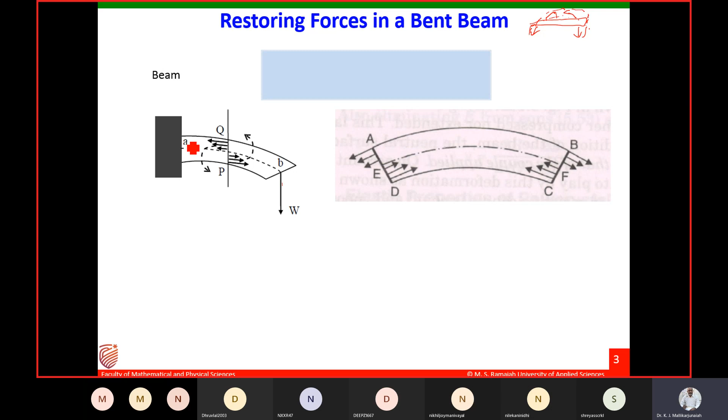That is the general meaning of restoring forces. Let us take this beam and pull it at one end, assuming the other end is fixed to a solid support. Whenever it bends, what happens realistically is that the outer layer we are considering, from that point onwards, some portions start elongating and some portions of the beam start contracting. That elongation and contraction are bound to happen whenever the given body is under stress.

Whatever extra force I am applying to make this beam bend, that will be counterbalanced by the corresponding bending couple. Whatever I am applying here should be balanced by another equal and opposite couple getting generated. The moment of this elastic couple, we call it the internal bending moment. This is whatever is getting tracked, the force or moment of this elastic couple, what we call the internal bending moment.

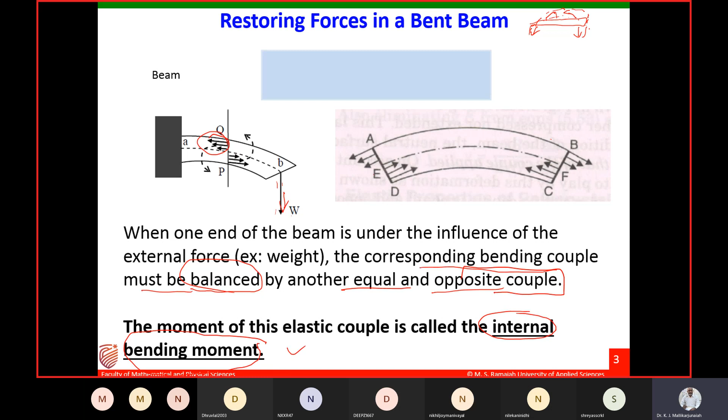This is the property of the given body which makes it remain intact under the influence of external forces. Let us consider this in a little more detail. Let us consider the beam. Assume that whenever we bend a pen or anything, there is a central layer which is not at all getting affected by the extra force we are applying on either side.

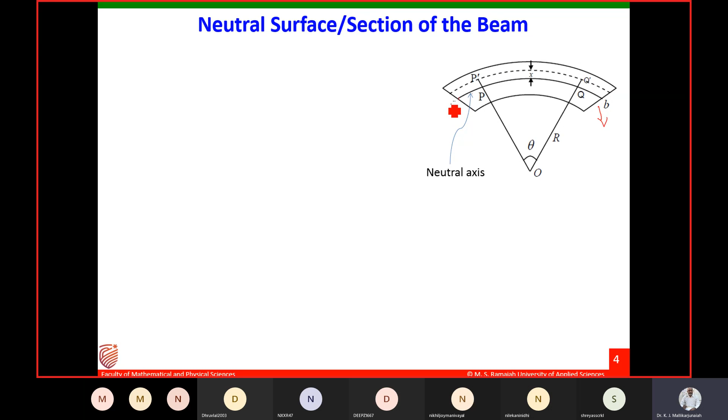Let us consider a filament P dash Q dash. From the neutral axis, let us consider another filament which is above that. I think we already discussed this in the last class, I'm just reiterating, that's why I'm going a little fast here.

I'm considering a new element P dash Q dash at a distance x, and the length of the filament in the unstrained condition is the same as PQ. That means P dash Q dash is equivalent to PQ whenever there is no extra force. But because of the extra force, P dash Q dash got elongated or strained. Now let us see how much length, how much it got elongated, due to the external force.

Okay, the original length PQ is equal to r theta. We already know arc length is given by radius of that arc, and what angle is subtended with respect to another reference point. Therefore PQ is given by r theta, and in similar fashion P dash Q dash is given by r plus extra x, R plus x into theta. Now the increase or change in length because of the extra force is given by x into theta.

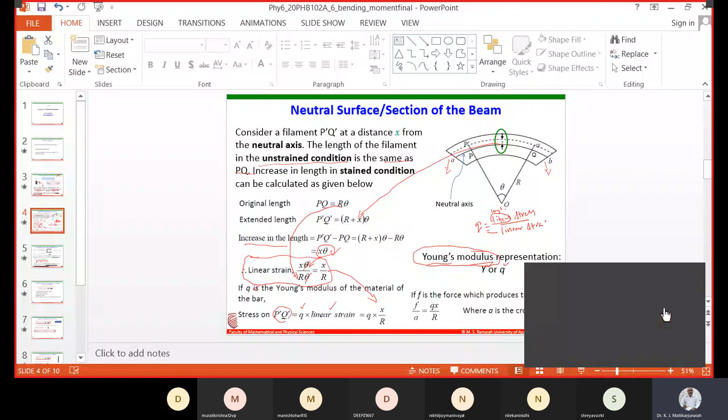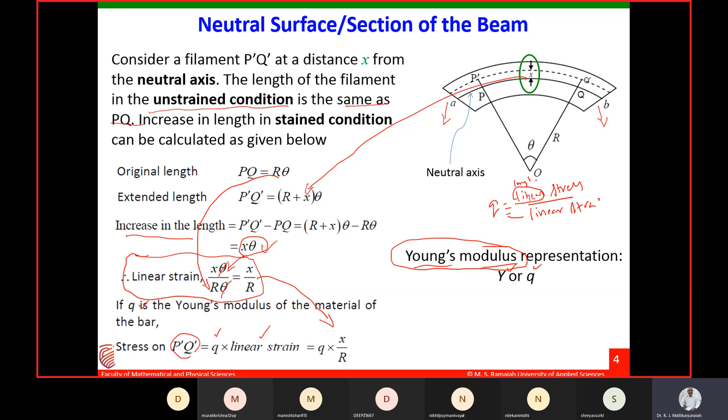Okay, now basically we got up to this point. Then here, once we got the expression for stress, how do we define stress?

Stress is defined as force per unit area. This linear stress is given by force per unit area of cross section. Let us assume there is a notation for cross sectional area as A, this is area of cross section. As I mentioned in the last class, please don't get confused with this A and the neutral axis representation AB. This is the neutral axis representation, where whatever we are writing A is the area, area of cross section. Therefore, stress is given by force per unit area.

Therefore, LHS I am substituting as F by A, and RHS we have QX by R. Now let us consider the same point. If F is the force which produces the stress, then that stress is given by force per unit area, and right hand side we just got the relation where A is the cross section.

Please remember this, whatever A I am considering right now, it is the cross section of the beam. Cross section of the beam.

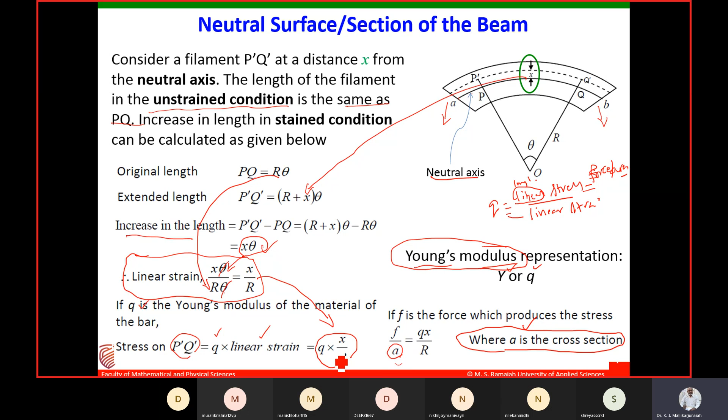Therefore the force which produces the stress is given by, just simplification of this relation, F is equal to Q into AX by R. I hope all of you are able to write it down, because this has already been discussed in the last class.

Now we got the expression for force. Now I want to measure what is the moment of this force. Now we got the elongation on a filament, what we have considered as P' Q'.

Now we got what is the force acting on this particular filament. I want to find out what is the moment of this force along the neutral axis. Force is acting on this layer, what we had considered for the time being. Now I want to understand what is the moment of this force along the neutral axis.

Therefore, moment of the force is given by force into perpendicular distance from the reference point to the given point. The distance is x from the neutral axis, and F is the force acting on the filament P' and Q'. Hope all of you are able to follow this step.

This is a very important step, that's why I am reiterating. Now that is given by the same expression, F multiplied with x, therefore x becomes x square, and all other parameters remain as it is.

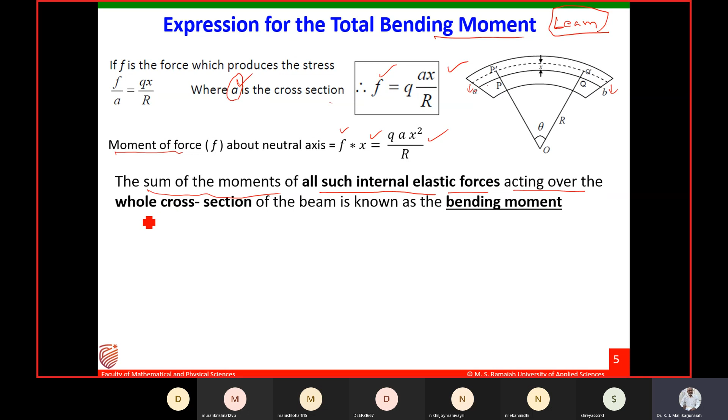Therefore, the net moment of the force, the sum of the moments of all such internal elastic forces acting over the whole cross section of the beam, we call it bending moment. The effective bending moment of the beam is the sum of such moments of all such internal elastic forces acting over the entire cross section of a given beam, that we call bending moment.

And hence the bending moment can be written as the summation of all these terms. We know that Q is the Young's modulus of the given material of the beam, therefore that is constant, and R is the radius of curvature it could have formed due to the application of the forces. Therefore that is also constant. This R remains constant, so that R we can take out.

Now I am left with summation of A into x square. A is the cross section and x is the representative filament's position with respect to the neutral axis. Therefore, the bending moment is the sum of all such moments of those forces. That's why we have written this formula.

Guys, are you able to follow up to this point? Hello? Yes sir. Okay, therefore I am replacing this summation of A into x square with another parameter I.

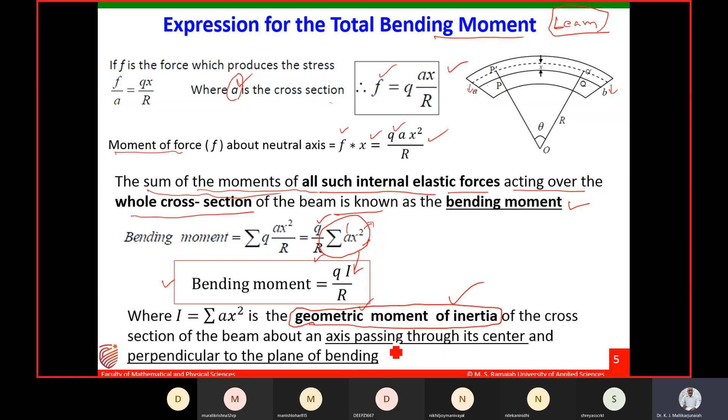Now we got the expression for I, geometric moment of inertia also. Now let us try to get a mathematical expression for the total moment of these forces. Just now we got the expression, bending moment is given by Q into I by R.

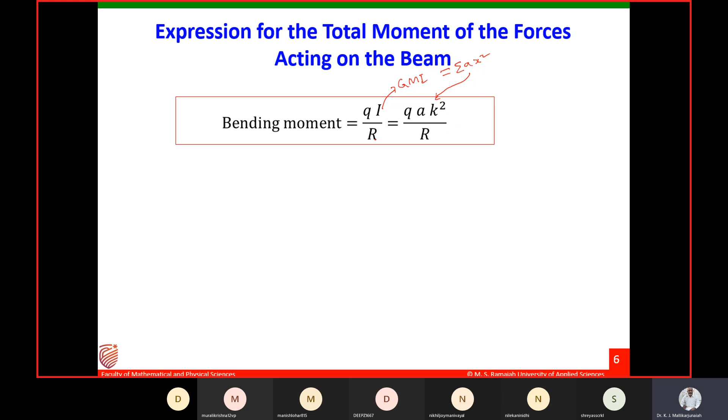I is the geometric moment of inertia, given by summation of a into x square, which we just defined. That can be written as a into k square, where I represents geometric moment of inertia, k is called the radius of gyration, a corresponds to the area of cross section, and q represents Young's modulus.

The denominator term r represents the radius of curvature of the neutral axis, which we already defined. If you make a circle out of that neutral axis, the radius it can subtend corresponds to r, and k is the radius of gyration. This is a new term we are going to discuss in detail.

Now the bending moment we got in terms of radius of gyration. Let us try to have this radius of gyration and area, and rewrite this entire geometric moment of inertia once again. Basically now we are restricting this general formula to different shapes of the beam.

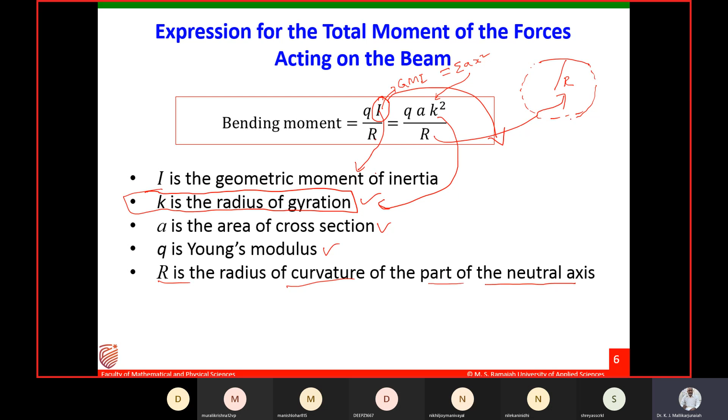Now let us consider a rectangular cross section beam. For that, the bending moment is given by q into I by r, and I is equal to a k square. This is the standard definition we are having. Now for rectangular cross section, what is the area of cross section? Breadth into thickness, depending on what is the breadth and what is the thickness.

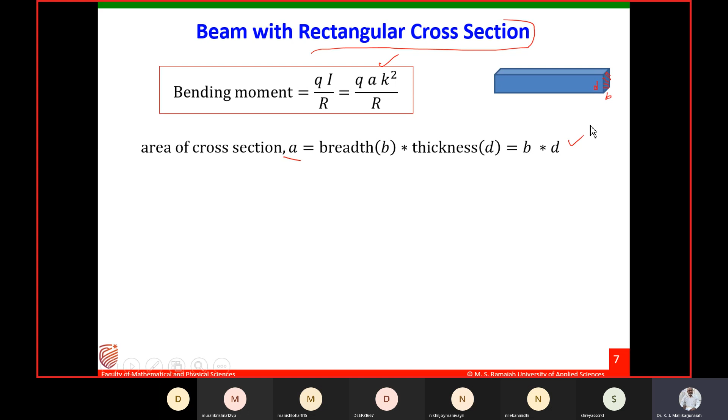Now we got the area of cross section, and the radius of gyration squared for that material is given by d square by 12. We directly take this notation; we are not going to derive what the radius of gyration value or square of the radius of gyration is. We are not going to do any derivations here, we directly assume it. In the exam also you can take it directly.

Now for rectangular beam we got the expression for k square, and it is straightforward to assume the area of cross section is breadth into thickness. We substitute in this formula, and we get that bending moment of the rectangular beam is given by q into a, which is b into d, and k square is given by d square by 12. So d becomes d cube, q as it is, b as it is, d cube divided by 12 into r. Now bending moment for a rectangular beam is given by q b d cube by 12r.

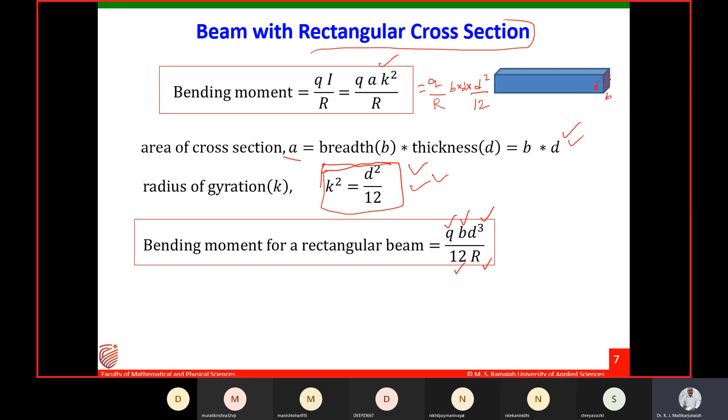Okay, and similarly we will do it for circular cross section. The same formula is valid. This is a circular shape, therefore the cross sectional area of the circle is given by pi r square, so we substitute a as pi r square, and radius of gyration squared for the same circular cross section is given by r square by 4. Again, in the exam you can directly write it the way it is given.

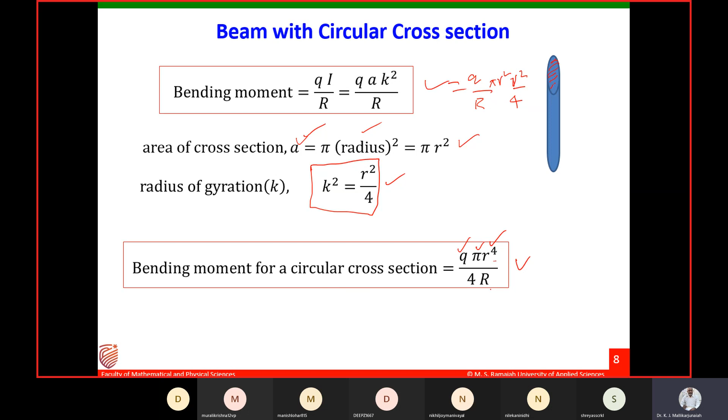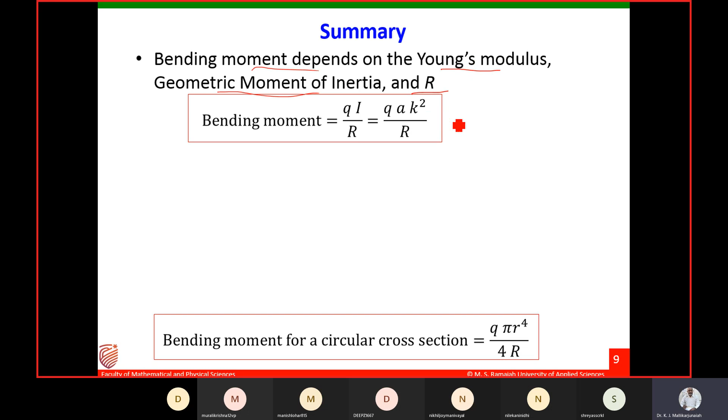Now in summary, we understood that bending moment depends on Young's modulus, geometric moment of inertia, and radius it forms, and this is the general definition for that. Young's modulus of the wire can be determined by calculating the bending moment. That's what we are going to do in the next class.

Therefore, bending moment for a rectangular beam, when Q is the Young's modulus, is given by the simplified formula QBD cube by 12R, and bending moment for circular cross section, as I've given before, is pi Q r to the power of 4 by 4R.